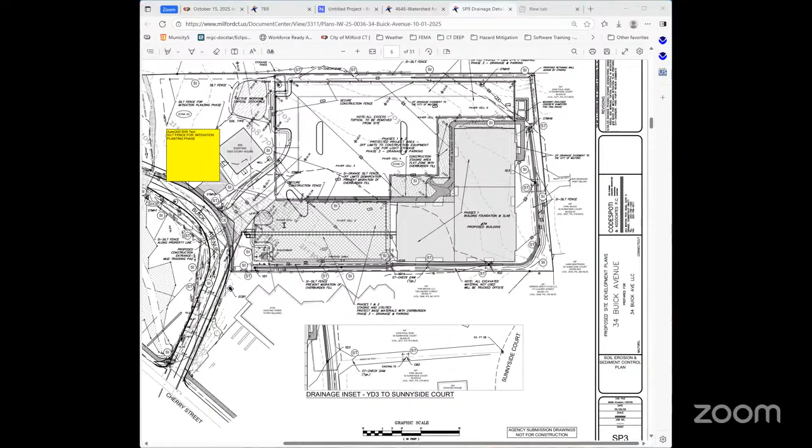It's not a binary choice of take them or leave them. The solution is to remove them and replace them with native vegetation, which is what's being proposed and indicated on sheet SP10, the biofiltration plan. Matt will be speaking a little bit later with regards to that.

The depressed area that's going to be located within that biofiltration area will also promote infiltration and groundwater recharge, both of which are beneficial to the adjacent 122 Cherry Street wetlands.

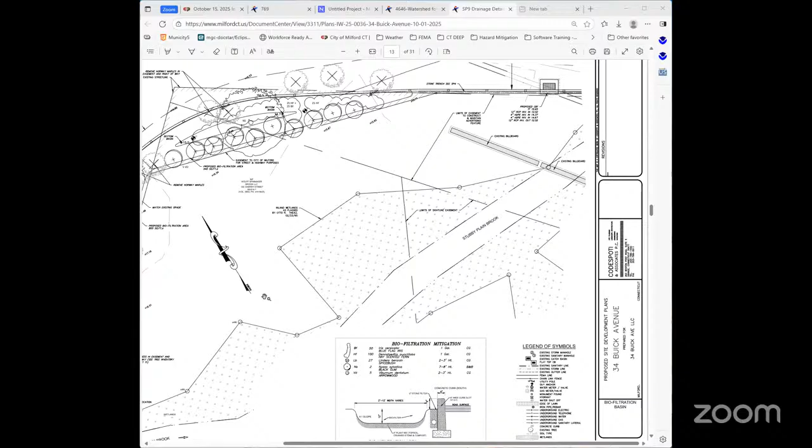I believe Mr. Silver had some general questions with regards to paver maintenance. The plan on SP3, in our sequence of construction and maintenance, calls for weekly maintenance consisting of having a landscaping company blow off the grass and leaves that may have accumulated in the area from landscaping operations. It's typically part of any routine care that's being done.

On a semi-annual basis, maintenance would consist of bringing in an outside company with mechanical machines or sweepers to vacuum the pavers. This is typically provided by an outside company, and there will be no equipment stored on the site for doing that type of maintenance.

The sweepings that come off of that are very typical of what the city does when they're taking care of their street sweeping operations, and would be disposed of by the contractor, similar to what the city does at that point.

When the contractor is doing that semi-annual maintenance, if the vacuuming or sweeping operations displace some of the stone or joint aggregate, that would need to be replaced at that time, which is a relatively simple operation. The aggregate is readily available through many material supply places, and it could be replenished simply by spreading it out, brushing it with a broom, and removing the excess material.

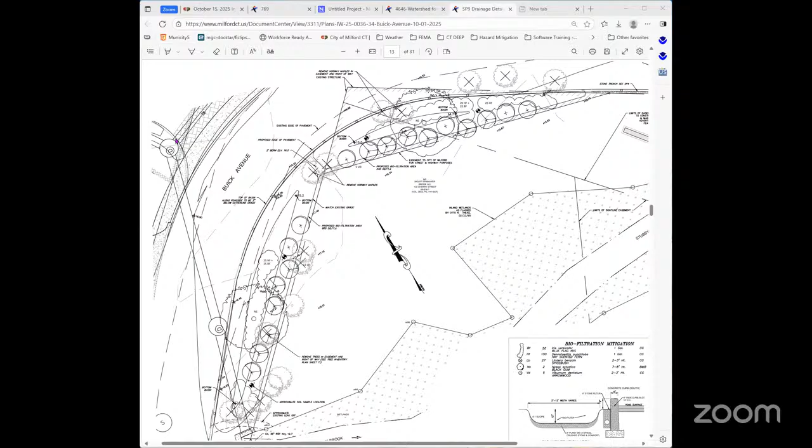So if we take a look, starting with Exhibit 3 -- do you have that one, Mary Rose? Okay. So if we start with that one, what we can see is that we've got approximately 6.9 acres in the existing conditions, which comprises Sunnyside Court, residential properties along Sunnyside Court, as well as the subject property and some off-site properties over on Governor's Lane. The crosshatch area represents that 6.9 acres, which is tributary to Buick Avenue.

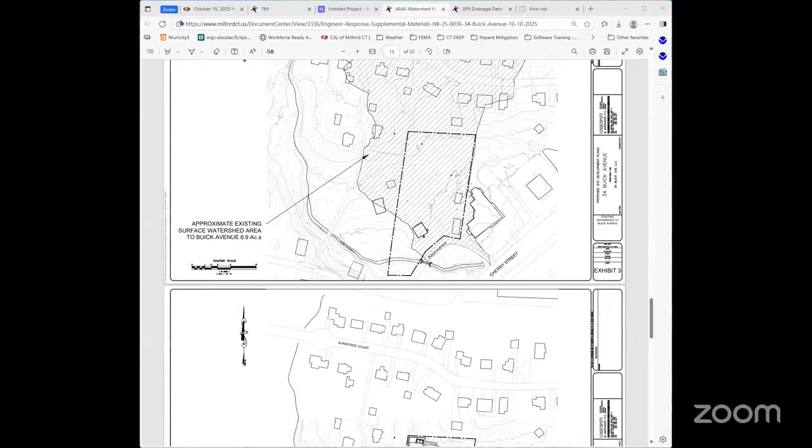If we bounce down to exhibit number 5, that will show a little bit more -- that will show a blow up of that area.

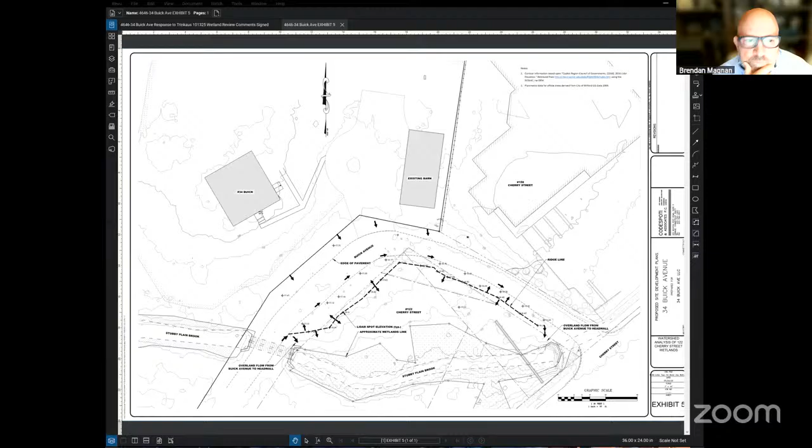There it is. Okay, so this is basically a blow up of that area of Buick Avenue. And what's significant with this exhibit is that the runoff presently coming across our site onto Buick Avenue is not flowing across 122 Cherry Street to the wetland areas.

What you can see from the topography depicted on this map, which is based on the 2023 LIDAR data, is that there's a ridge line running through the 122 Cherry Street property, which prevents any of the surface runoff from Buick Avenue from being able to sheet flow through or across the 122 Cherry Street property to get to the wetlands. So in essence, the ground immediately adjacent to the pavement is acting as a curb, so to speak.

So the runoff coming across from that 6.9 acres and our site is going to come across, go across Buick Avenue, hit that south side edge of pavement, and flow down to the low point towards Cherry Street, right in that general area. Then when the water is high enough, it overtops that low point at that section and discharges to the head wall immediately adjacent to it.

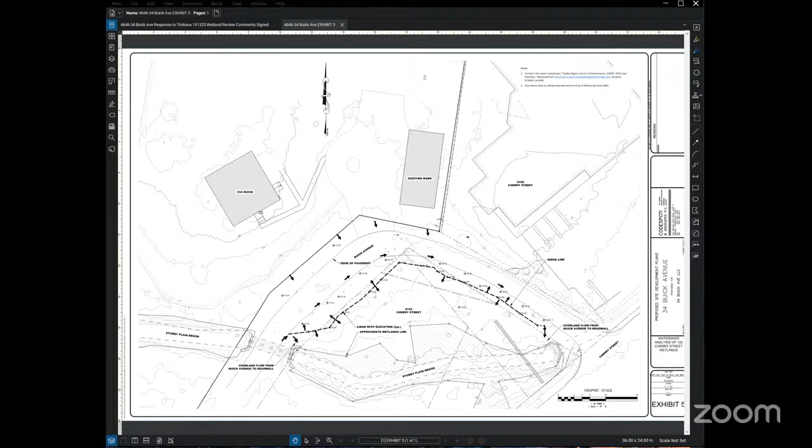So I think that pretty much wraps up or summarizes the comments that came out from the public as well as the commissioner comments. So the last item I'd like to go over with the commission is the comments that came back from Mr. Trinkaus.

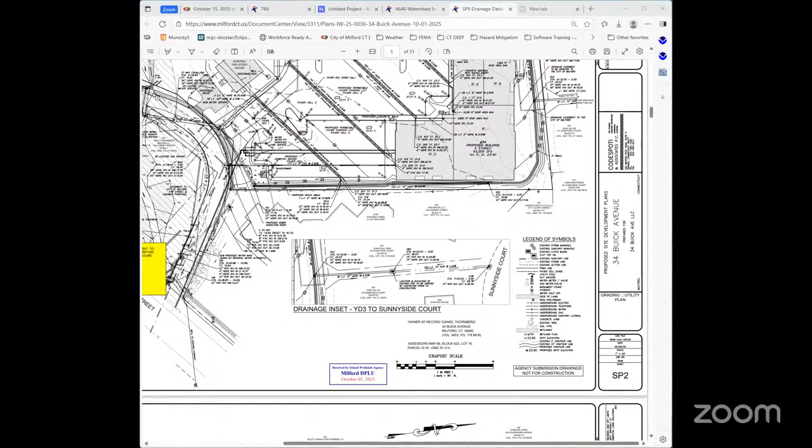They were received at a relatively late hour, basically provided to us yesterday afternoon, so that didn't give us a lot of time to really get the response together. That's why we did work on the responses and got those over to Mary Rose this afternoon for incorporation into this hearing and into the documents.

So I'll go down through Mr. Trinkaus's comments and provide our verbal responses. Mary Rose does have our hard copy, or the email copy, of our responses.

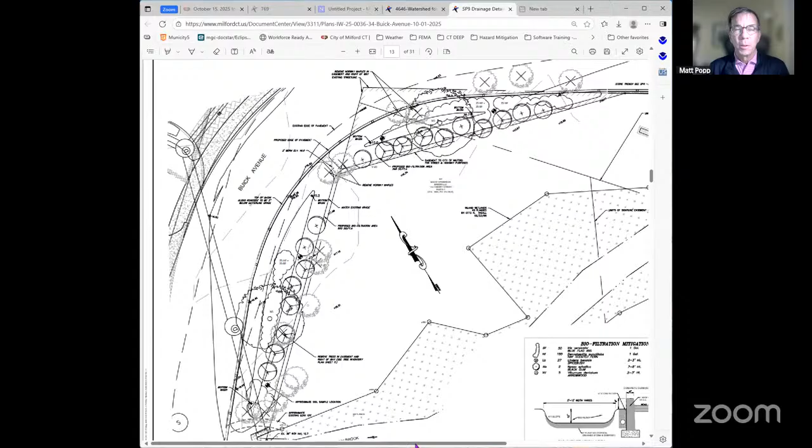Thanks, Bob. Matt Popp, landscape architect, professional wetland scientist with Environmental Land Solutions. Mary Rose, if we can get the SP10 up - that's the biofiltration basin at the planting plan that was on, so SP10.

If you look carefully at this, there's actually two basins, shallow depressions in the biofiltration basin, so there's two cells. The water basically will flow from the bottom left there, flows up the road, keeps going up to the top right, so it kind of flows from west to east. There's a cell there and there's a cell there again, with kind of a higher point in the middle.

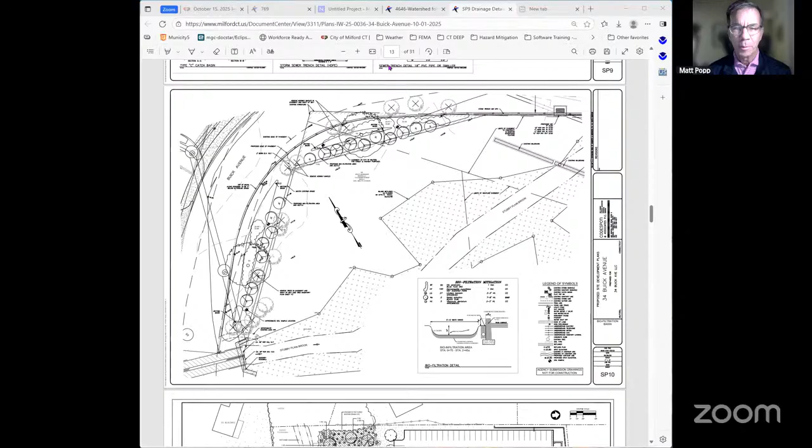Once it flows from there, along the curb, there's actually a stone trench right along the curb. You can see the catch basin, right up on the top right. So the water flows again from the bottom left to the top right, and goes towards that trench. The basin, if you look at the bottom right of this drawing, there's a detail of what the basin looks like - it's a shallow depression.

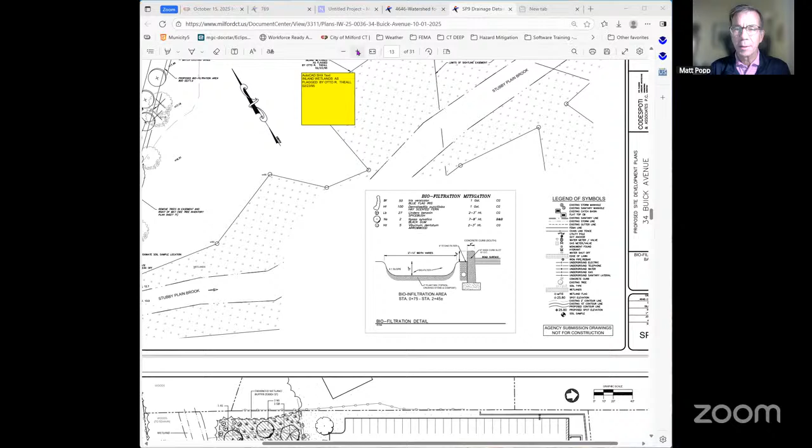It has about 4 to 6 inches of material at the bottom. That material will be approximately a third sand, calling it gravel, a third topsoil, and a third organic matter like compost - that's usually what is used in basin bottoms. The sandy soil allows for infiltration, and the underlying soil is very loamy, so the water will flow through that pretty well. Again, it gets planted with native plants - there's a plant list just above the detail showing those plants, mainly deer resistant, shade tolerant plants.

Several Norway maples will be removed and we're replacing them with a couple of black gums and a number of shade tolerant shrubs.

The other thing that was submitted was a non-native invasive plant management plan for the entire site, but mainly for this basin, and then for the wetland buffer to the west of the existing house.

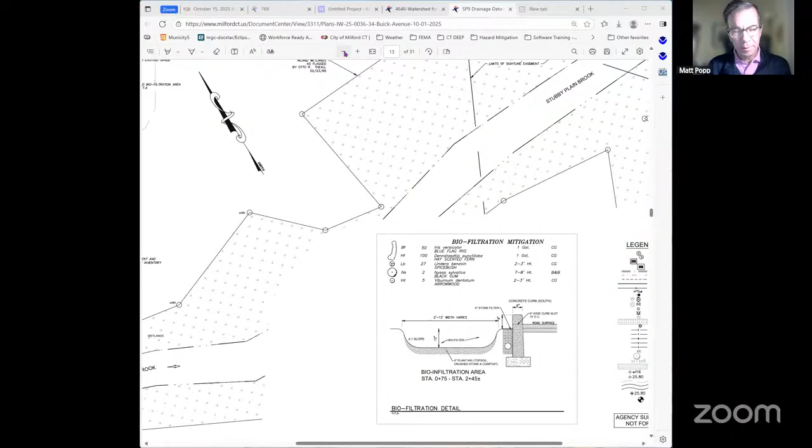That management plan has a list of species that we're targeting: Norway maples, multiflora rose, which is out there, burning bush is out there, some privet, bittersweet.

And it has four ways to control these plants. The first is by hand pulling, just pulling them out by hand. That's the easiest way to get them.

The second would be by grubbing. Again, that's just if it's a multiflora rose, then maybe that has to get pulled out. But I think these plants would be small because they're not within the buffer area currently that would be managed. The third is just cutting the plants at grade.

The fourth and last way to treat these plants would be by herbicide treatment. That would be if there was a large stand of invasive plants in one area, which currently there isn't. If there was a large stand of knotweed, that would probably be the appropriate method to do.

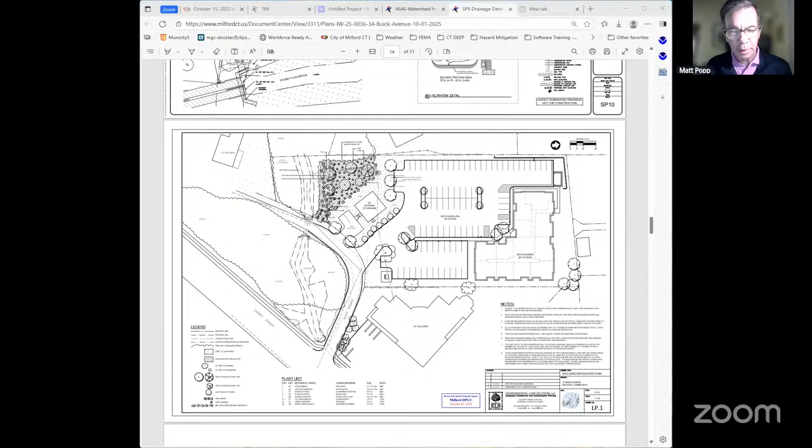The treatment will last for 2 consecutive years, and the plan has at the back of it methods to remove each of these plants and how it would be done. So we submitted that and it's fairly general.

I think the main thing is just to get the plants early on, routinely, and when someone's cutting the grass, they should be in there looking for these invasive plants at that time.

I think with the review, the Land Tech review, the William Kenny Associates review, and Mr. Trinkus's review, we have a much better plan. We incorporated a lot of their suggestions into this plan, and in my opinion, I think this project is a very good project that will not have an adverse impact to the wetlands just off to the site.

Again, it's a flashy water course, very disturbed, parts of it have been filled, kind of a lot of invasive species in there. So if there's any questions, I'll be happy to answer them.

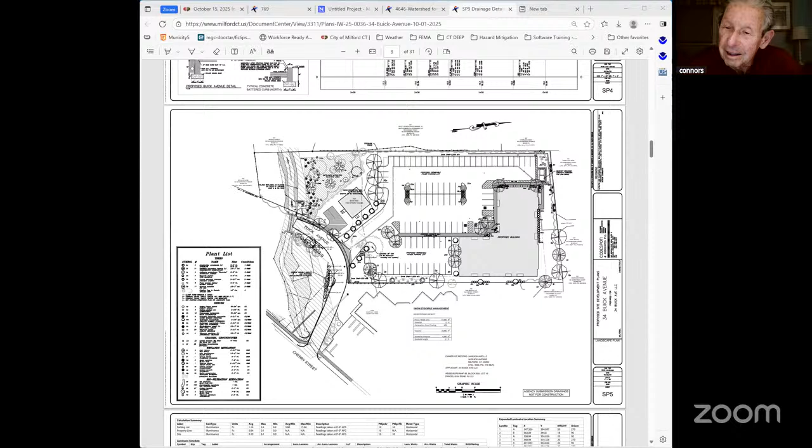I think it's been well covered by a lot of experts, and I don't think we can do much more with it. It's as good a plan as we're going to get.

Okay, Mr. Black, do you have anything to say? Ms. Valvo, you feel comfortable? Yeah, I don't think everything there's quite a bit of information on all sides, and I appreciate everybody putting the time in to give us as much information as possible. Certainly a lot to think about.

Great, how about you, Ms. Valvo? Do you feel like you have all the information you need to begin deliberations? Yes, I do. I think they've covered a lot. It's a lot for us to still discuss amongst ourselves, but yeah, I think that it's all been well presented, in my opinion.

Okay, and Mr. Field, I'm going to come back to you. You had a question or two before. You're always good with questions. One last question to you: do you feel like we have all the information to make a deliberation? Do you feel like there's anything that we haven't received that we should be asking for?

No, I think the engineering firm did a very good job in the follow-up. I was impressed, along with what they're going to do for the wetlands on the road. The only questions I'm going to have is for the commissioners in terms of requirements we may be looking for them to move forward. But other than that, no, I feel they've really adjusted everything, and it was well presented.

Great, thanks, Mr. Field. How about Mary Rose? Do you have anything to offer by way of guidance from past experience hearing this discussion?

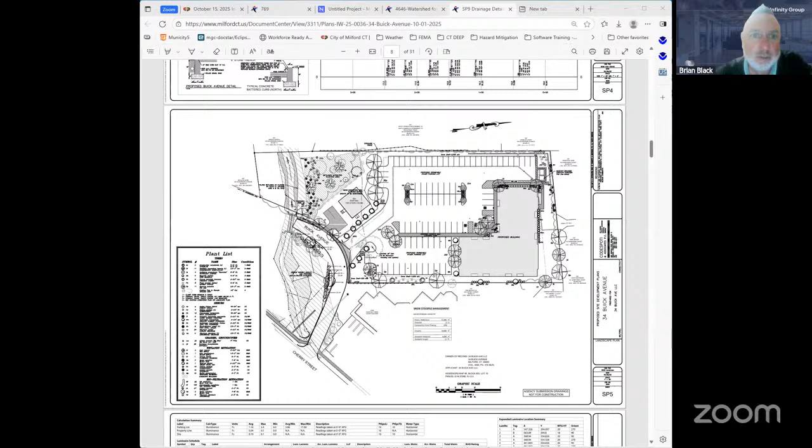Okay, maybe I could ask Mr. Ryder to comment on that, to the extent that you could clarify whether you feel like we have all the information or if there's follow-up discussion that we want to have now with the applicant team. I believe all the information has been presented, and I don't think there's really too much else that can be discussed on that topic.

Mr. Chairman, it's Attorney Crusaden. I can shed a little bit more light on that discussion with the city attorney and director of public works if you like. Sure, Mr. Crusaden, go ahead, you have the floor. So yeah, thank you.

Just real quickly, we had several meetings - I've had at least 2 meetings and a lot of conversations with the city attorney about this issue, as well as a meeting and a half, I think, with the director of public works. One of the meetings was joint with Bob Weway, and all 4 of us were in the meeting. So, just for the record, we had offered to put in a drainage system. The city has a right to drain off of Sunnyside onto this property. And we had offered to put in a connection.

We had offered to, I think, even put in a system. I want to back up a little bit - Mr. Podleski was also involved in other conversations with Mr. Weway about it. And the very first comment from the city attorney and the director of public works, when we had these conversations based on concerns that were brought up during the public hearing for that runoff from Sunnyside, from our very first public hearing meeting, were: well, that is the city water, and we can't make other private property owner treat that water. We just have a right to drain on their property, which that right to drain is being honored by the design that Bob has established. And then the further comment - and Bob could add to this because he had the conversations with Mr...

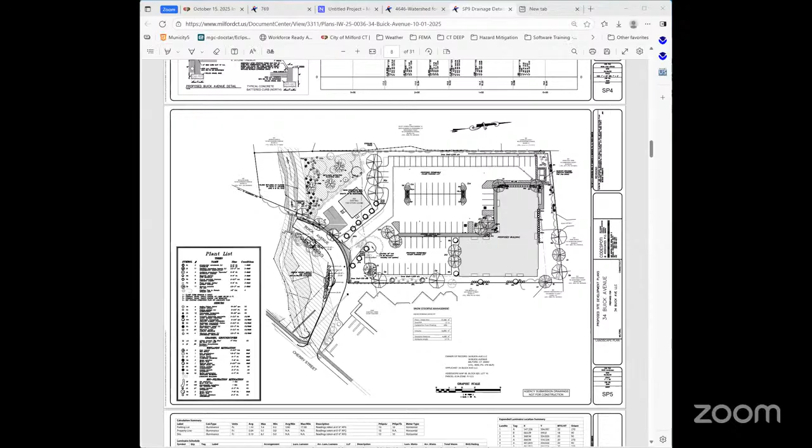Thank you, sir. Thank you very much, Mr. Krusaden. Appreciate your testimony here and your support.

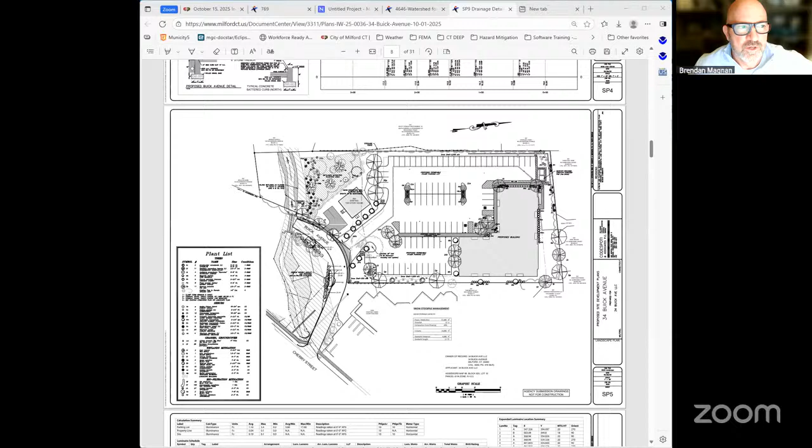At this time, I'd like for the agency to call a motion to close the public hearing, unless there's any last minute questions. I think we've pretty much asked and answered. So could I have a motion to close the public hearing? I make a motion to close the public hearing. Okay, I'll second it. And it's been seconded by Mr. Jim Connors. Any discussion on that motion? Hearing none.

Lisa, roll call vote, please. Brian Black, aye. Jim Connors, aye. Matthew Connors, aye. Nick Ritchie, aye. Julie Valvo, aye. Buddy Field, aye. Brendan Magnan, aye. The motion carries. The public hearing is closed.

Mary Rose, if you could, just remind me, I believe we have 35 days from now to make a decision. Is that correct? That is correct. We have 35 days from the close of the hearing to make a decision. I believe that 35 days brings us to 11/19/25. Great, thank you very much.

And we do have a meeting, I believe, in 2 weeks, which would be what day? We have a meeting on November 5th and also on November 19th. Okay, great. So I would entertain a motion to resume deliberations on this matter at the next meeting. The reason I'm suggesting that, and would like for the agency to support that, is we have Mr. Gradwell and Mr. Bahave who have been in attendance in the public hearings and will participate in review of this meeting, and they will participate in the deliberation process.

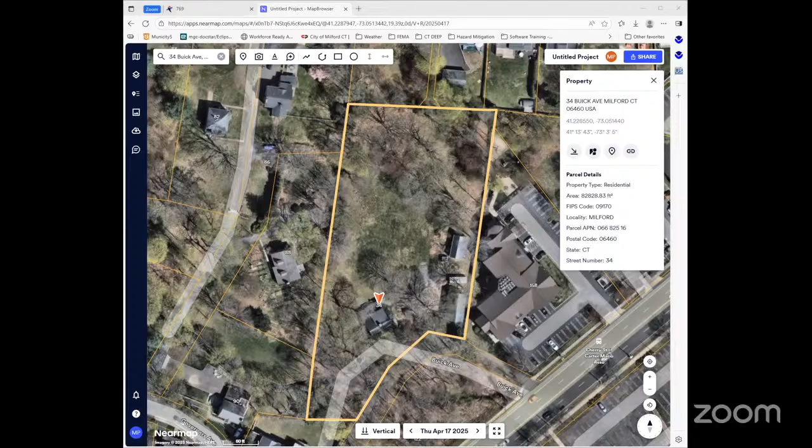Nope, site is down. Mary Rose, you can just speak to the last question. I think we've all reviewed those matters that have been circulated to us. Can you just speak to that last question? Sure, the what if the wall falls? Right, so the concern is, and it was raised by Ray Gradwell in one of the last meetings, that should the wall fall, potentially things in the wetlands, the inland wetlands, could be impacted trying to rebuild the wall or get back to the wall or restore things. And so what are the protections for the little piece of inland wetlands that's next to the rear of the wall?

And this will not load, and I apologize. Yeah, don't worry about the documents, we have access to them. I wouldn't sweat that, we know where it is.

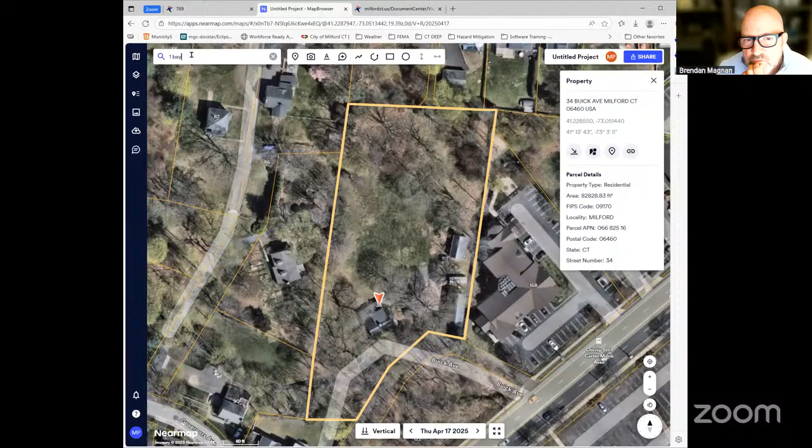Gotcha. I think the question in my mind is, and Ms. Rispini, I'm going to put you on the spot, if you could please identify yourself for the record after I ask my question: in your representation of the application, do you believe that the plan adequately addresses the question as to whether or not there's an adverse impact to the wetlands if that wall does fail during construction? Can you address that question for the agency? Okay.

I believe we have followed all the instructions and we're going to make sure it doesn't happen. Our intent is not to make it fall. So we're going to try everything possible, but we don't know exactly what could happen, we're going to try our best.

I had a contractor out there today, but in order for them to give me any information, they need to see all the guidelines and all the approvals before they can even consider it.

Can you just say your name and address for the record? I'm Jennifer Raspini, One Bayshore Drive, representing One Bay Shore LLC.

Relative to that last point you just made, I'm not sure what you mean. Maybe just can you clarify what your contractor said?

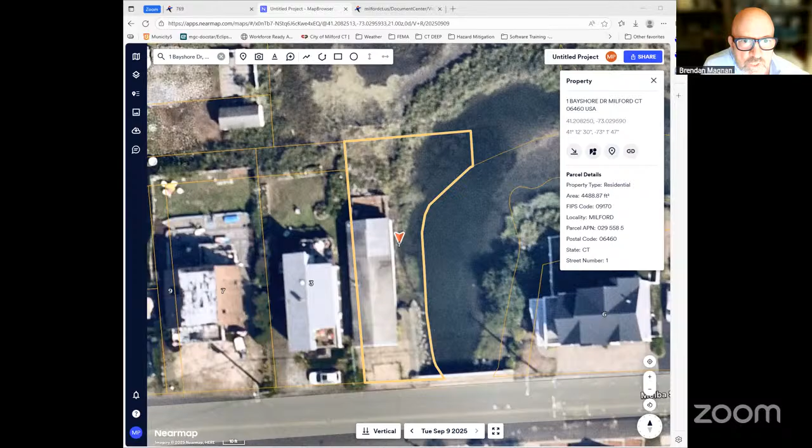And that will flow down to your chosen contractor, and you'll be responsible for ensuring that he or she adheres to the construction sequencing. That's correct, and we plan to do that.

Okay. Mary Rose, is there anything you'd like to add? There's a number of things in the responses left to the builder to provide—the sequencing plan, the plan for maintaining the drainage system and maintaining the wall. I fully get that those things can vary; there's a number of ways to do them.

Mr. and Ms. Raspini have stated that their plan is to get that from the proposed builder. But what we need to know is how that's going to relate to our approvals. If they come up with something that isn't compliant—the only method that works for their construction doesn't work with our approvals—it would have to come back.

I would suggest, if the agency was inclined to approve without having a plan for how that area would be protected, that there be a requirement to submit that before they take the permit out, so we can review it, and that there be field meetings with this contractor to make sure they fully understand it.

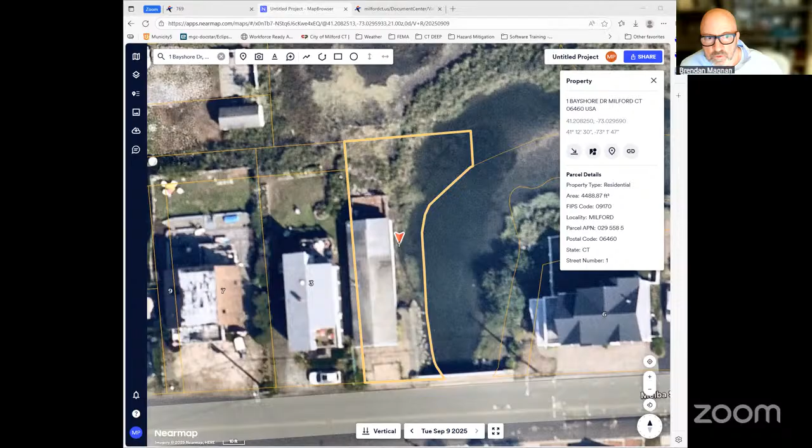Great, thanks, Mary Rose, I like your recommendations. Sounds like the applicant, Mr. Raspini, you're looking to agree to those. Is that correct? Yes, we discussed that last week together.

Mr. Field, Mr. Connors, I'm going to lean on you. Mr. Black, what questions do we need to ask of this applicant that we haven't already, and do you agree we have all the information to render a decision? I'm looking at the plans right now, the ones stamped October, I think it's the 9th.

I'm scanned back and forth. So in one cross section, it shows the pre-existing wall and it shows the new wall. That's an S20, dated October 9th. Then you scan down to S22, it's the same thing. Then you scan down to S-4.0, it has a cross section, and it looks like they're trying to...

It's completely different than the other two. It basically looks like they're taking the existing wall, and they're going to anchor a 3x6 L shape, probably steel, to it. I don't have a scale here, and there's really not a dimension. It says 12 inches, so it looks like they're about a foot off the pre-existing wall, and they're going to create their new wall in there. But then I'm trying to cross-reference that with the plans, and nothing really matches.

So I do agree with Mary Rose that they basically have to come in with a more extensive plan of why this house hopefully won't crash into and become real waterfront property. This is just to protect them too. Everyone yeses everything to death to get something approved, and then when it comes to actually doing it, sometimes they don't really follow directions. This is a very tough case situation. I've never seen anything like this before, and with the tide and everything, it's going to be very tough. I just want to make sure they're protecting themselves, because if it does fail, they are going to be back here, and it would very well affect the wetlands. That's what we're here to protect, the wetlands.

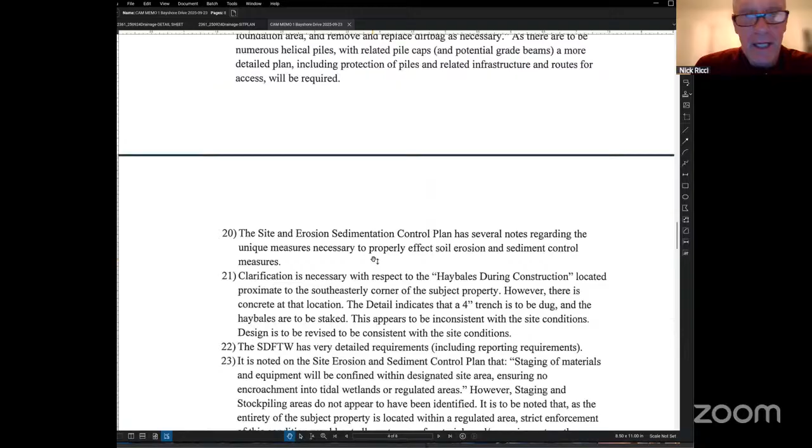Mr. Nick Ricci, go ahead. I don't know if it's in our purview—I'm not an engineer, but I've seen on other projects where they install a temporary bulkhead to protect the wall in case it does fail. I don't know if we could require that, or if that's not in our purview. Through you, Mr. Chairman, Mr. Ricci, they can do no work waterward of that concrete block wall. Okay, that solves that question. All right, sorry.

Just trying to help. Okay.

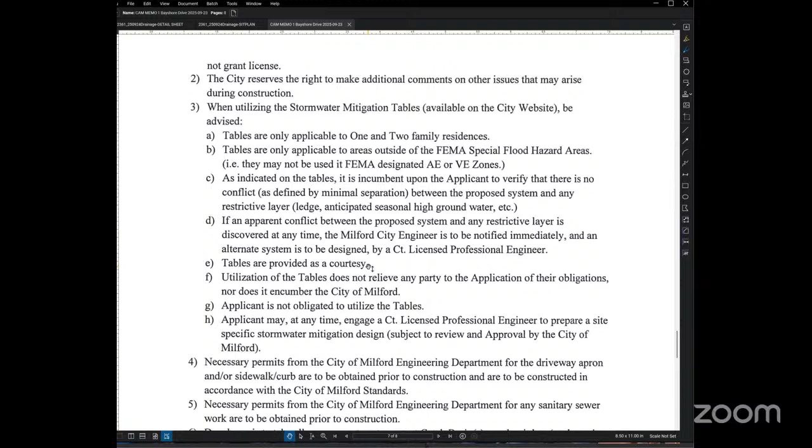Mr. Chair? Yes, go ahead.

Not for nothing, the applicant might want to reach out to a contractor that basically lifts houses, because they're the ones that deal with foundations down by the beach in situations like this, and they have to replace it with foundations. Granted, usually you don't have the ocean next to you, but they have a lot of experience in this area. This isn't a job for some guy who puts in foundations every now and then. This is someone who this is basically what they do.

And Ms. Raspini, you can take that as a suggestion. It's a helpful suggestion, but relative to the engineering report, Mary Rose, are there outstanding items that need to be addressed that would preclude us from following your recommendation if we were going to approve this as presented, conditioned upon this extensive pre-sequencing plan that needs to be established? What are your thoughts on that?

I believe the majority—I'm trying to call it up, but there was an update right before I left today and everything is not playing nicely. I believe the latest memo from the city engineer I have is from 9/23. At the time, a number of his items were CAM or zoning items. They should be on the screen right now. Yep, we see the report. Okay, I had a difficult time pulling it up myself, but I guess the conclusion is we're ready to entertain a motion to proceed here.

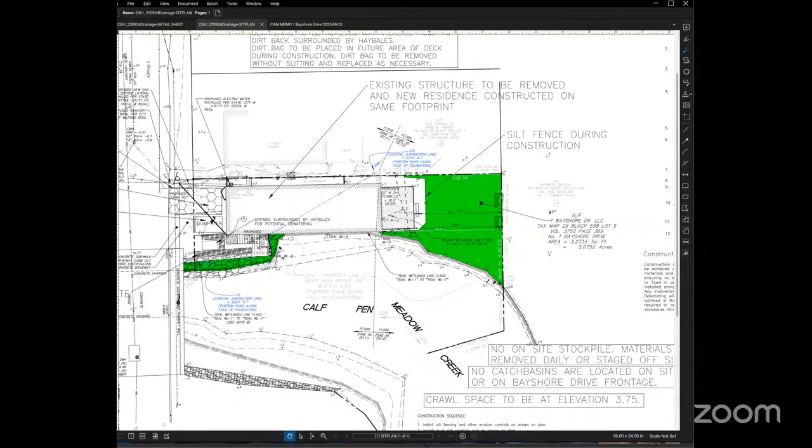In a meeting with Mr. Raspini, he stated that construction would proceed from the demolition at the front of the site, by hand. They're removing this by hand from the front of the site. As they move along, they would start the shoring up and structural control of the existing concrete block foundation. It's very important that they keep that foundation where it is per DEP, and it is right on the coastal jurisdiction line. That was the plan he described to the city engineer and me, and also in a meeting with Ms. Raspini—that is their proposal for how they plan to work. He did refer any failure of the walls to the contractors' means and methods; they wanted to see what their contractors would come up with.

Perfect. Okay, Mr. Connors, go ahead.

My question was in regards to the motion and the requirements or conditions. Do we need a requirement for the pre-construction meeting, or is that part of it? And obviously we want to add, prior to the pre-construction meeting, that an emergency wall response or wall collapse response should be submitted. Would we say that? Do we agree on that? I'd entertain a motion to that effect—that's what Mary Rose recommended. Let's proceed.

I'll make the motion. Okay, if everybody's comfortable with that before I make the motion. Yeah, go ahead and make the motion, we'll discuss it.

All right, Mr. Chairman, after duly considering all relevant factors, I move to approve application IW— oh, I'm sorry, I'm on the wrong one. I'll start over, sorry, there's so many pages today.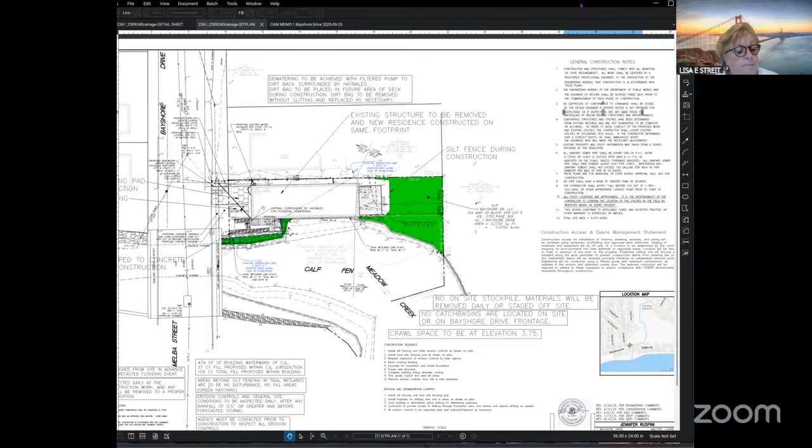If there's no discussion, Lisa, roll call vote. Brian Black, Aye. Jim Connors, Aye. Matthew Connors, Aye. Nick Ritchie, Aye. Julie Valvo, Aye. Buddy Field, Aye. Brenda Magnan, Aye. The motion carries unanimously.

Ms. Ruspini, good luck with your project. I'm sure the office will be in touch and you'll be in touch with the office. Thank you. And I had no idea you guys would stay up this late to volunteer. I really appreciate this, sincerely.

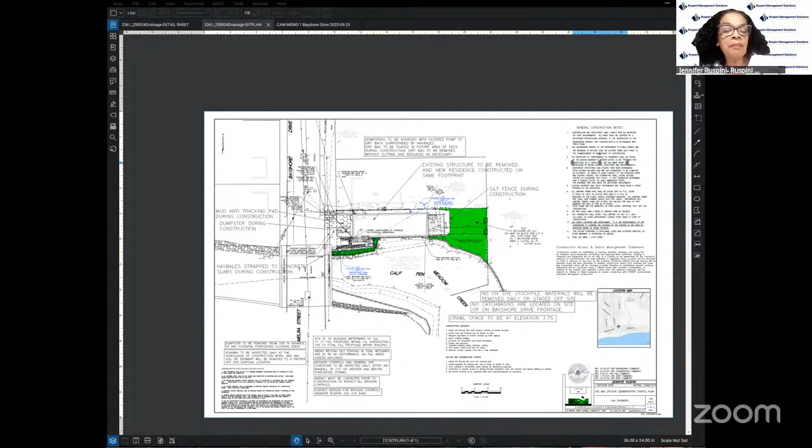Welcome. Thank you. Thanks for being patient as far as being in the queue here after a lengthy public hearing. I learned a lot tonight. Good, I think. You guys were just being pushy before, and I realized, oh no, they're really asking a lot of questions, and I learned a lot. Thank you. You're welcome. Thank you.

Good luck on your project. Yes, good luck. Thanks. We appreciate you coming. When I finally build it, you guys will be the first ones I'm going to put on top of the rooftop. We're going to test it out together. Thanks a lot. Thank you. Bye-bye. Good night.

Okay, new business. We do have, Mayor Rose, if you want to just flash up the agenda, we do have item IW 250054, which we received at the last meeting. We're not taking any action on this evening.

Moving on to item G, consideration of the minutes from the previous meeting on 10/1, which was the public hearing and the regular meeting. Do I have a motion to accept those minutes as presented? I'll give you that motion. Great. Mr. Connors, do we have a second? I'll second that. Mr. Black, thank you. Any discussion on the motion?

Hearing none, all in favor, Lisa, roll call vote. Brian Black, Aye. Jim Connors, Aye. Matthew Connors, Aye. Nick Ritchie, Abstain. Julie Valvo, oh, I'm sorry, I have to abstain as well. Apologies. Julie, Aye. Buddy Field, I have to abstain because I wasn't there last week.